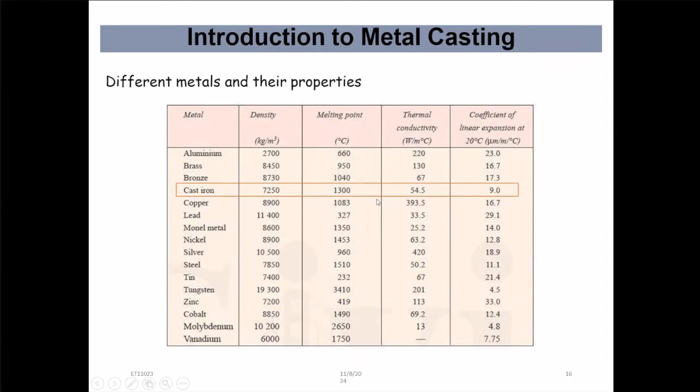Then let's move into why we used sand as the material for making the mold cavity.

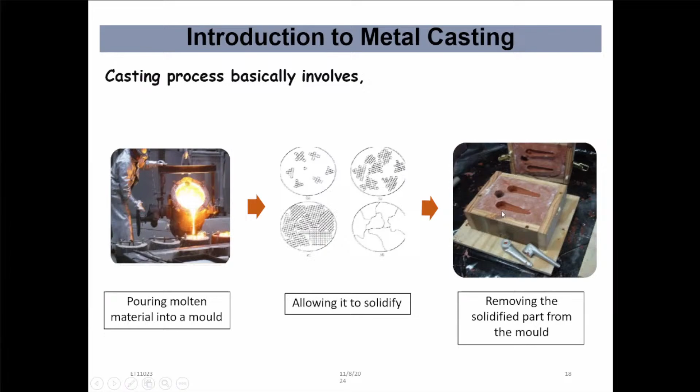Then it's solidified, we can get out that casted part. Then we have to break that mold cavity, take out the part.

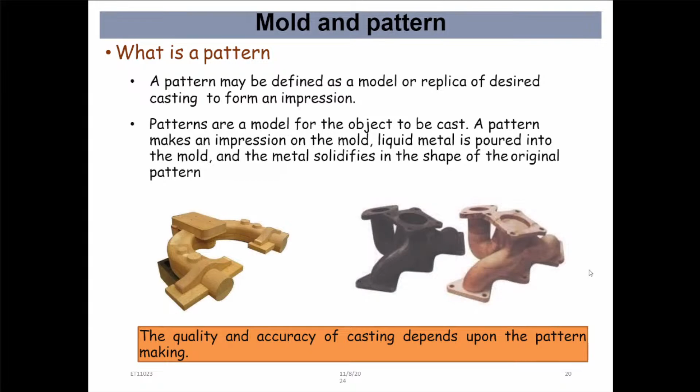Then the pattern making materials. The most widely used material is wood. What are the reasons we use wood? It is cheap and light. It can be cut and fabricated into numerous forms by gluing, bending and carving.

Because we can easily shape it using tools in a wood workshop, and can create a smooth surface by sanding. It also has a tendency to wear by constant contact with sand.

The main reason is the durability and the ability to shape it easily. Wood is the most widely used material in making patterns.

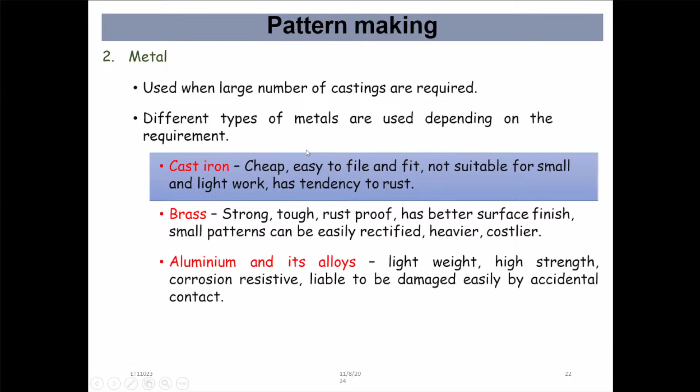These are some metals used for making the pattern.

Then there's plaster, the plaster of Paris or gypsum cement. These are other materials that can be easily cast into intricate shapes and worked easily. Plaster of Paris has a very high compressive strength. We use this plaster to make small kinds of patterns.

Another material is plastic, specifically thermosetting resin. Did you hear about thermosetting resins? Thermosettings, thermosets, thermoset materials.

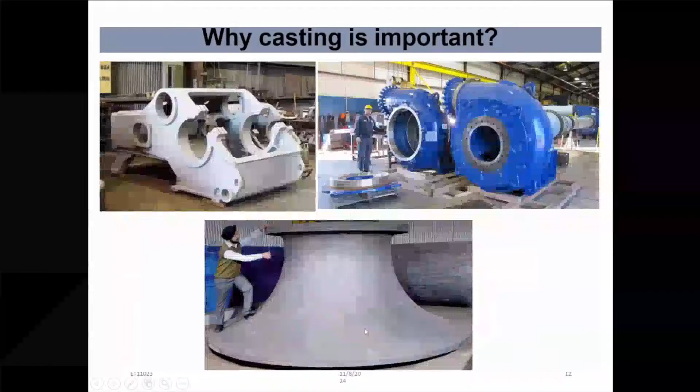I explained earlier: shrinkage and porosity. What's the meaning of shrinkage?

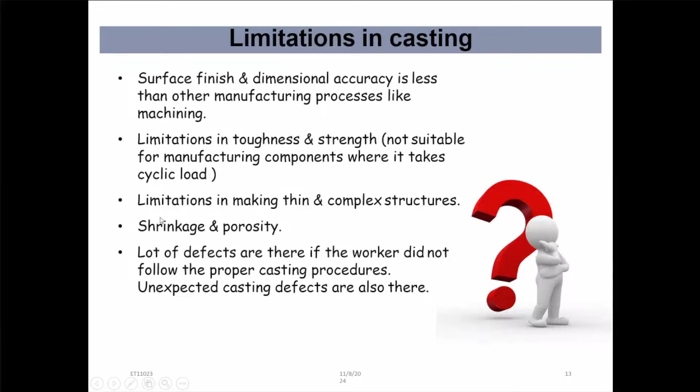Shrinkage means there is a phase change, a phase change from liquid phase into solid phase.

Then what happens? The volume of the solid body decreases with time. Yes, the volume of this solid body decreases with decrease in temperature.

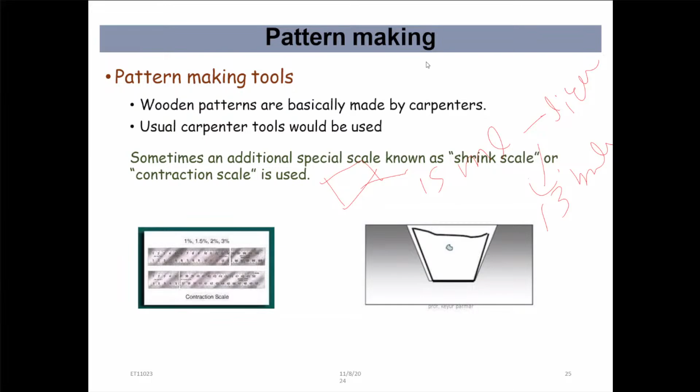Then let's move into the pattern making. Types of pattern.

Selection. The selection of the types of pattern depends on the shape and size of the casting, the number of castings required, and the method of molding.

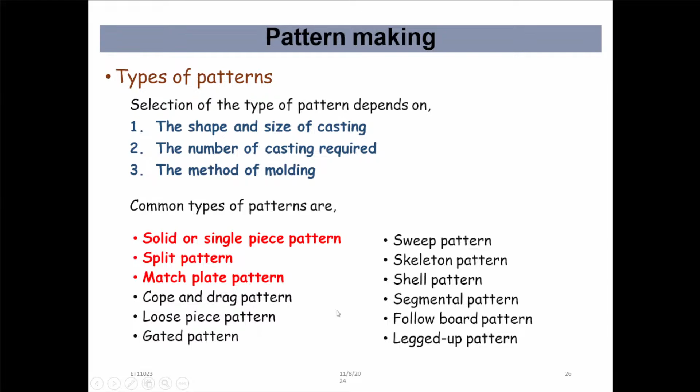Common types of patterns are solid or single piece pattern, split pattern, match plate pattern. I'll explain the red colored one only; the others are for your further reading.

Solid or single piece pattern. It has a compact single solid body. Actually, this is a single part. We don't need two separate parts, or two parts in the whole system.

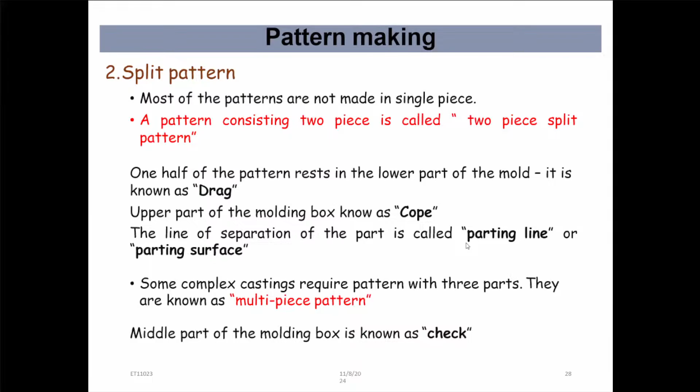Okay, you will see the two-piece split pattern. You can see how it may look.

Why do we need this kind of core? What's the reason for this?

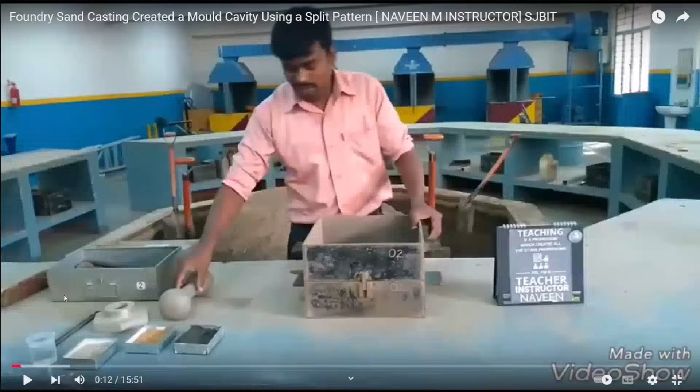This is called a split pattern. Split pattern means two pieces come, one from the top box and one from the bottom box. The other pattern is the single piece pattern, also called a solid pattern. This is the molding box. Here are two boxes - the top box is called the cope, and the bottom one is called the drag box.

Then we want to create the cavity using the pattern. First we want to use the bottom box. Lift the top box and take it out.

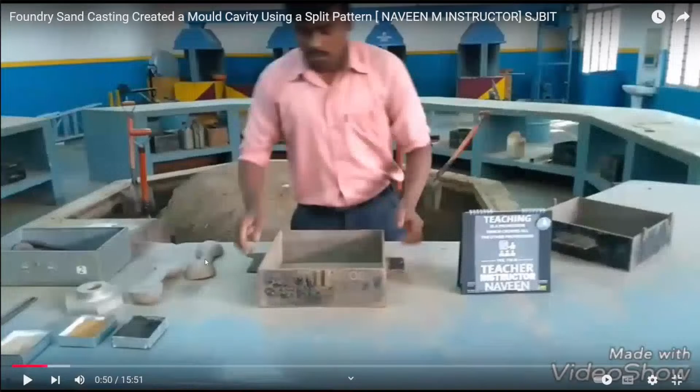What is this? These parts - can you hear this part? Can you see this part? What do we call these parts? What's the name of this part? These two items.

These two are the patterns.

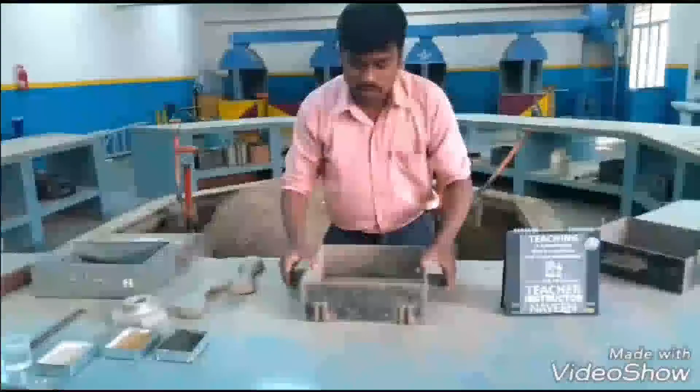Once the box is positioned, we place the pattern. It is the split pattern, which is a dowel pin concept. Where the flat surface is there, we want to place it properly - place this one properly in the middle.

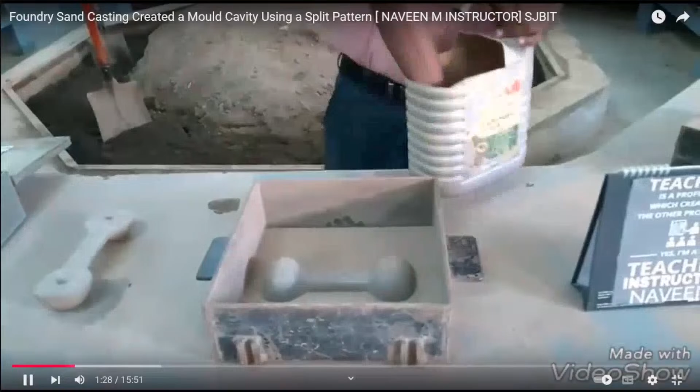Now apply a little bit of parting sand or chalk powder. Why we are applying this - so the sand doesn't stick to the floor itself. Apply it just like a powder.

Now we are using the green sand. The green sand contains clay, red silica sand and moisture. There is a certain percentage in which we mix the clay, moisture and bentonite powder. Already we have mixed the green sand - just here it is the sand.

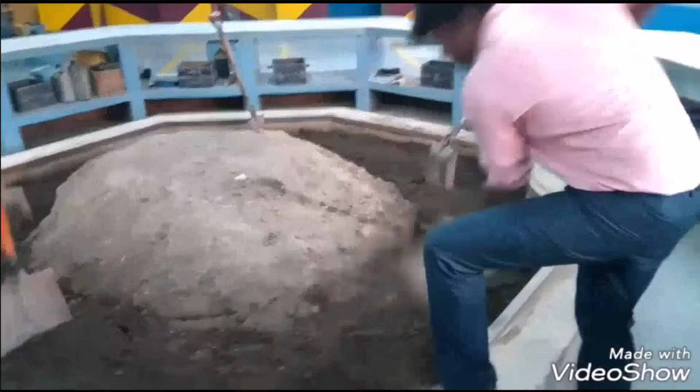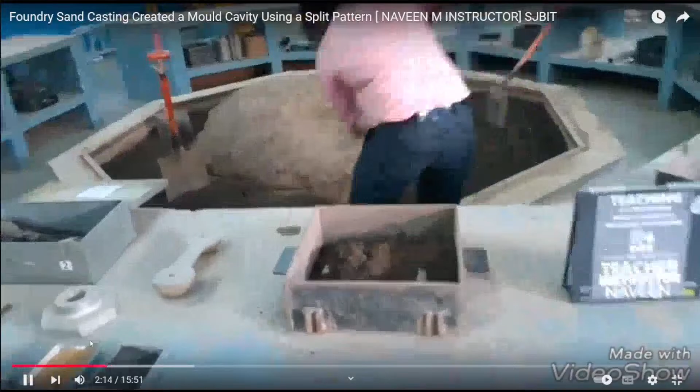If nothing will happen, we use our hands and don't require gloves. Why - because here the moisture, clay and bentonite powder are mixed in the sand. Just arrange the sand.

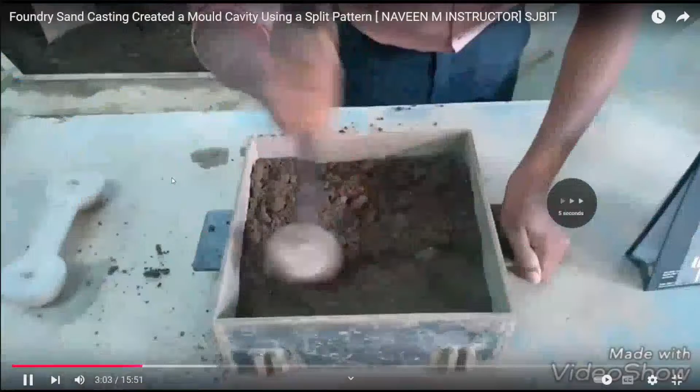Next, use the pin hammer - it is called the pin hammer. Why we want to use the pin hammer - because we want to do the ramming properly at the corners, using the pin hammer itself.

Once the ramming is completed, again put the sand and do the ramming.

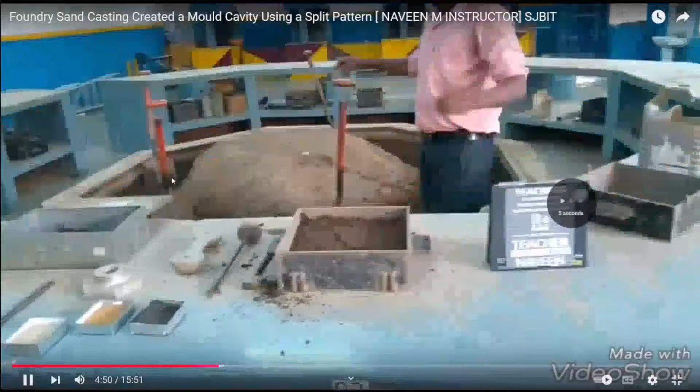Use the leveler - it is called the leveler. When you are using the leveler, at a time you cannot level the whole box. Step by step you want to do the leveling.

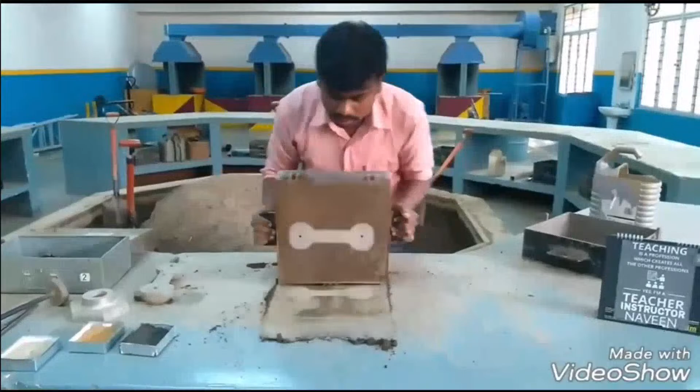The box. This is the cope or the drag - this is the upper part or lower part of the box.

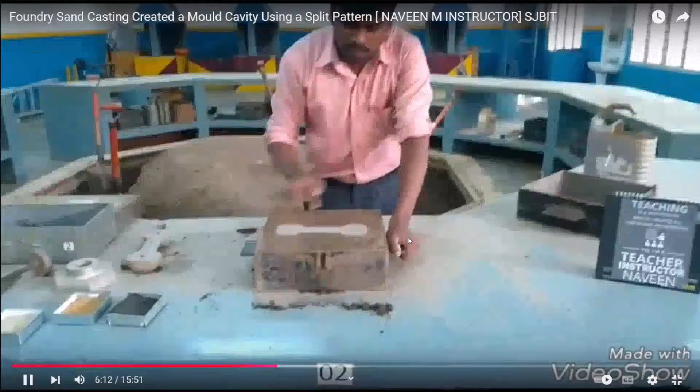Properly, where the dowel hole is there, we want to match the dowel pin like this. Once the pattern is placed properly, we place it.

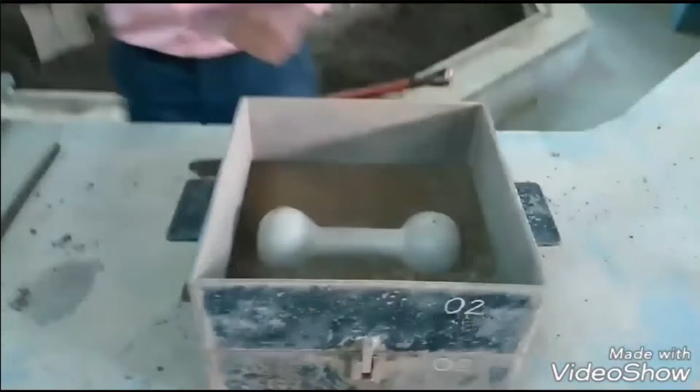Place it here. Okay students, what is this part? These parts - what's the purpose of these two parts?

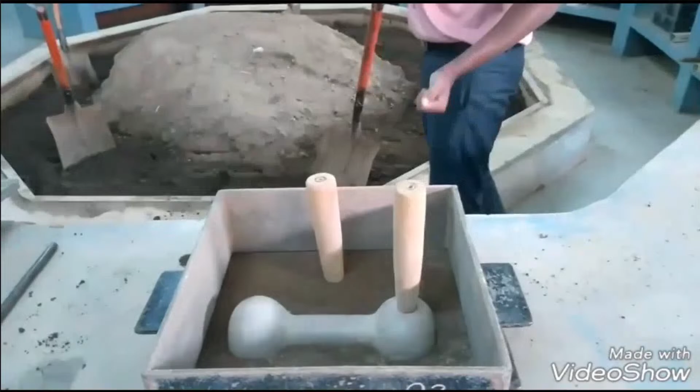Now take the sand, put it in and do the ramming approach. Before putting the sand, apply a little bit of parting sand.

The same way we rammed the bottom box, step by step we want to ram the top box.

Now the top box ramming is done, use the leveler and level the top box also. But when we are leveling the top box, we want to level around the runner and riser carefully. Here also, step by step.

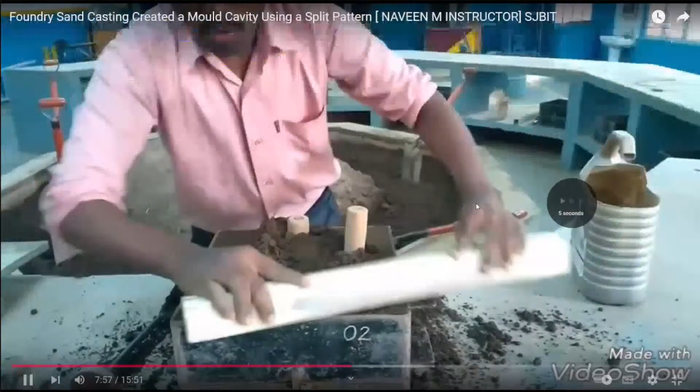Now carefully lift the top box.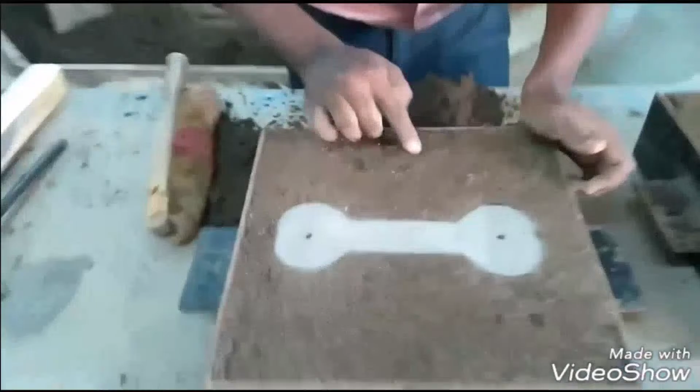Just observe - one impression is the runner impression. This impression we want to mark - that means it is the gate. We want to cut the gate from here for pouring the molten metal.

Just mark the impression - your round impression, the runner impression is there now. Just mark it for that impression, which wants to connect with the pattern.

Now make the dip - maximum we can make it 5 mm, minimum 3 mm. Create the gate here.

Now we have cut the gate. Just clean the gate - just observe how to clean the gate. Finish the corners.

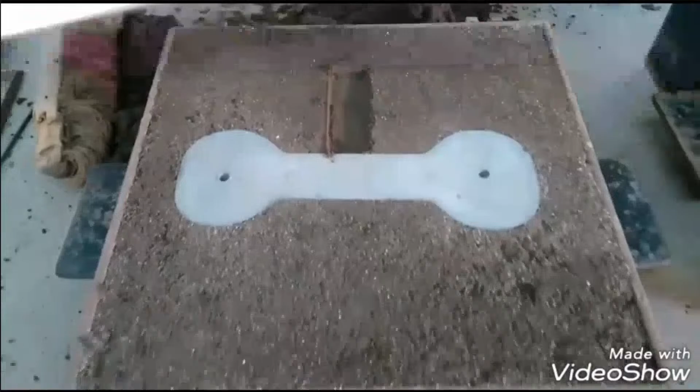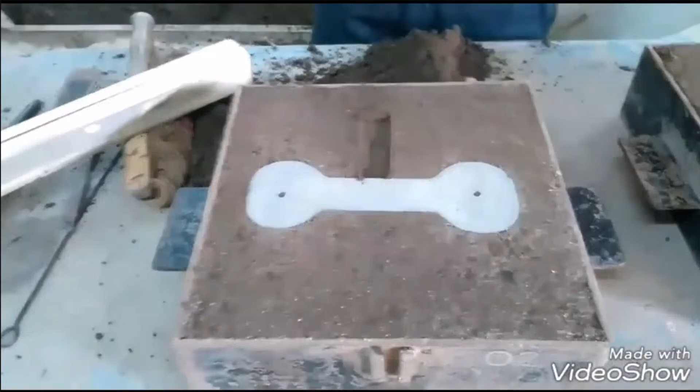This is called the mold cavity. This part is called the runner, that's for flow of the liquid molten material into the cavity. Now look at one more top box.

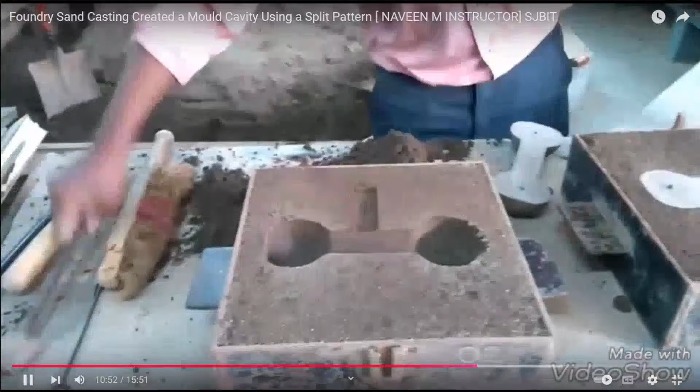Now this created the cavity. We have placed the top box from the bottom box itself, meaning here itself we are pouring the molten material. Just observe, now we want to place the top box. It is fully finished. We have created the cavity from split dumbbell shape split pattern.

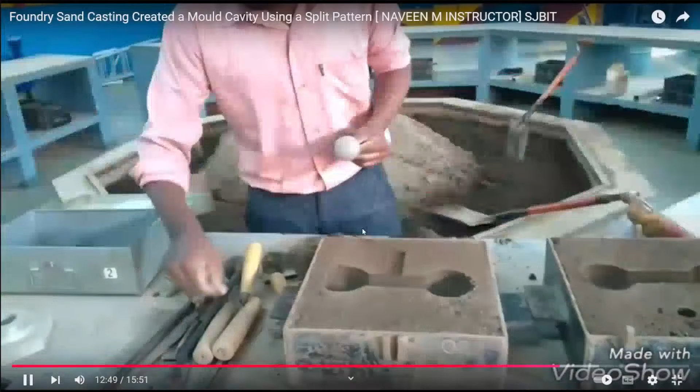Just observe how to finish the smoother. Just observe how to smooth the surface like this. We can smooth the surface.

Use the small lip leveler and level this one properly. Don't put too much sand, only as much as required. We can finish it like that. Now we have completed updating the top box.

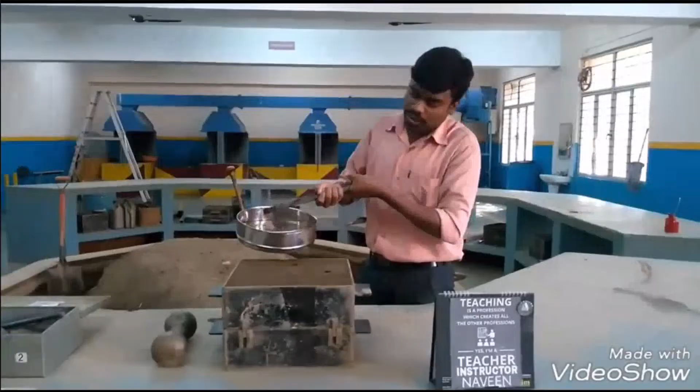Now we pour the molten metal. It is not, we are pouring the wax. So once the riser is filled, we want to stop pouring the molten metal. Now we will pour the molten metal. After solidification, we want to break it. We want to give a little bit of time for solidification.

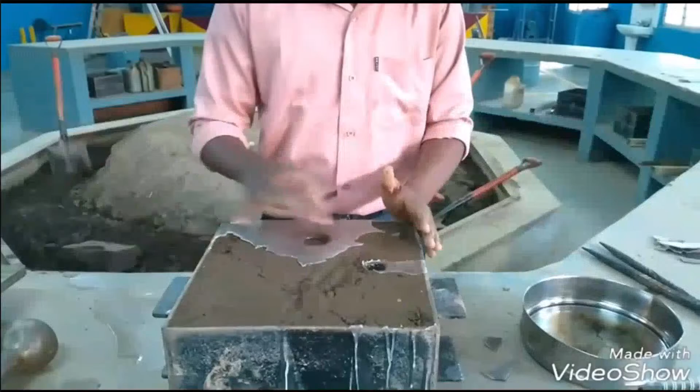After it is fully solid, we want to break the box, and whatever cavity we have created inside, the casting becomes as it is. Now we have poured the molten wax. We want to give the time for solidification. After solidification, we want to lift the top box. It is fully solid, now lift the top box.

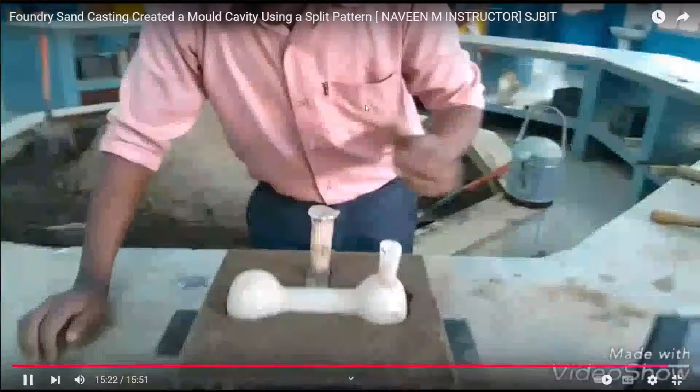See, we have broken the top box. See how the casting is stable. It is the riser, it is the runner. Finally, we want to cut the riser and get the runner out. You can see these two parts: this is where we pour the molten material, and this is the riser.

We can see that after filling this whole mold cavity with the liquid molten material, it will rise up. Then we guarantee all the volume will be filled with the molten material. Then the casting will come. Finally, we have to remove the excess parts, then finally we can get the desired shape.

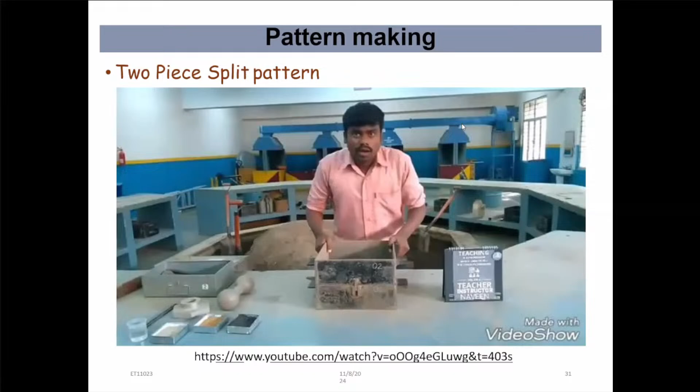Then the match plate pattern. The third pattern type is the match plate pattern. That's a single pattern where a number of patterns may be mounted on a match plate. The plate can be made out of wood or metal, mostly aluminum. The reason for using aluminum is the lightweight and high strength, because it is a durable material. That's why we use aluminum as the pattern making material.

Then the cope and drag portions of the split patterns are mounted on opposite sides of the plate. You can see this image. This is the upper part and this is the lower part. Both the upper part and lower part are attached to one single plate.

That means if we need to make this part, we can cut it in this plane and mount the upper part to the upper side of the plate and the lower part to the lower part of the plate. Then we can make the riser, I'll explain the riser and other things later. Then we can make this whole part as the pattern.

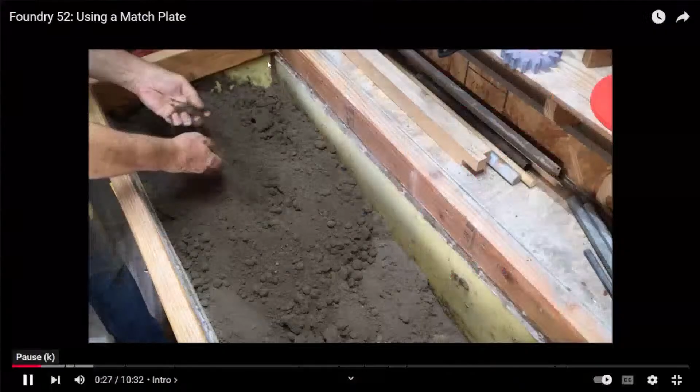So can you see the video? Hello. Can you see the video? Yes, sir, we can see the video. Okay.

Here we started with the drag.

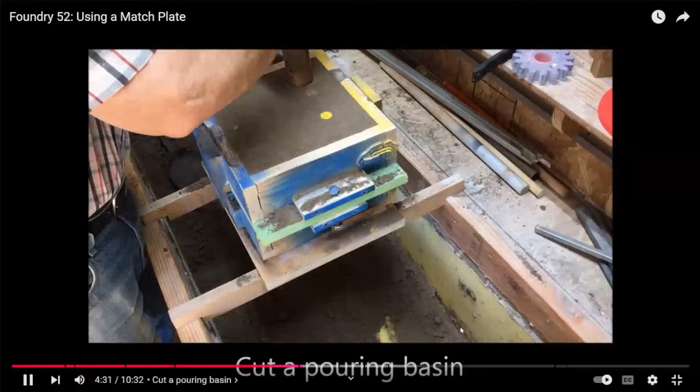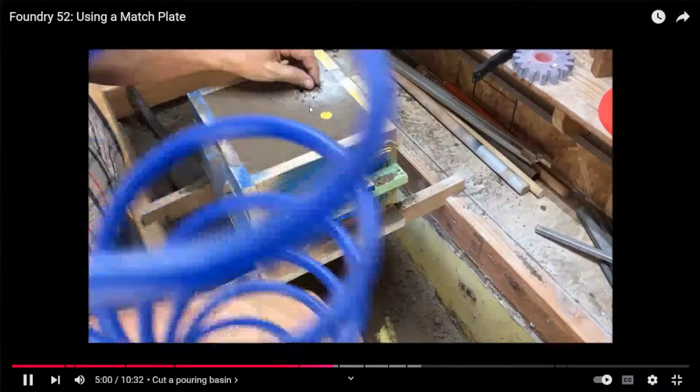Then cut a pouring basin. Actually, he increased the size of the pouring cup here.

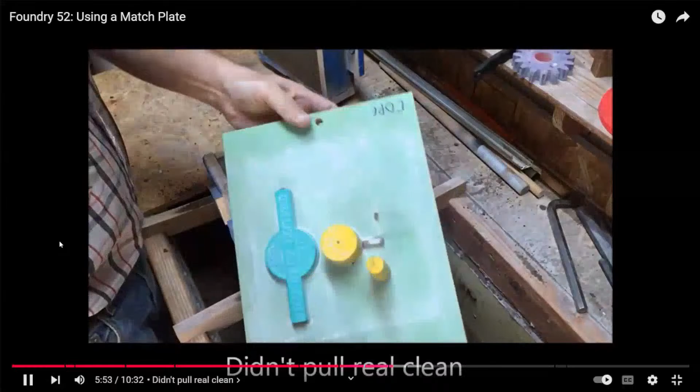Actually, this is the match plate. This one is the match plate. This is the mold cavity that we need, the required shape. It has the required shape actually.

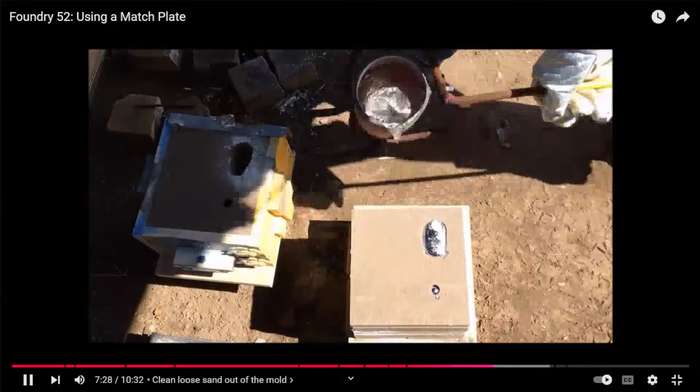This is the open riser. You can see the material comes out from the open riser. Then we can ensure the whole mold cavity will fill with the molten material. Finally, we broke the mold cavity and we can get the part out.

This is actually, we need only this part. We need only this part. Only this part. But these are the additional materials.

Now you can answer the previous question I asked. What's the reason for high production rate when we use the match plate pattern? Now, can anyone answer me? Can anyone answer me? What's the reason for high production rate when we do the casting using the match plate pattern?

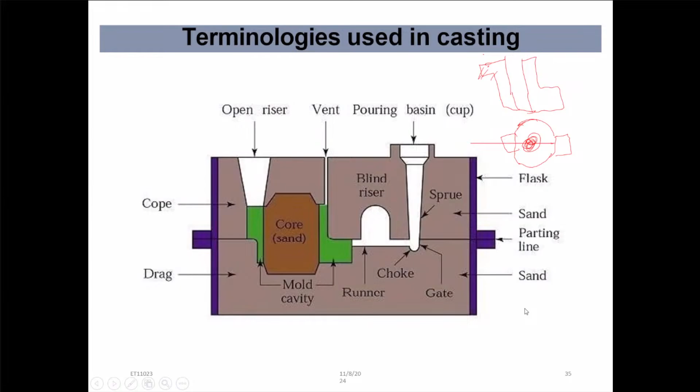And what's the purpose of this gate? There is some slag with this molten material. The slag is contaminated at this gate point, and the clean molten material flows through this funnel and fills this mold cavity slowly. Then the quality of the final product is good.

Core - I think I explained about the core earlier. We need a core to build the interior parts. Molding material means the metals or alloys, or likewise any materials.

Flask, cope. Cope means the top half of the pattern. Drag is the bottom part of the above features. And core print - what's the core print? Core print is the region added to the pattern. Core print is used to locate and support the core within the mold.

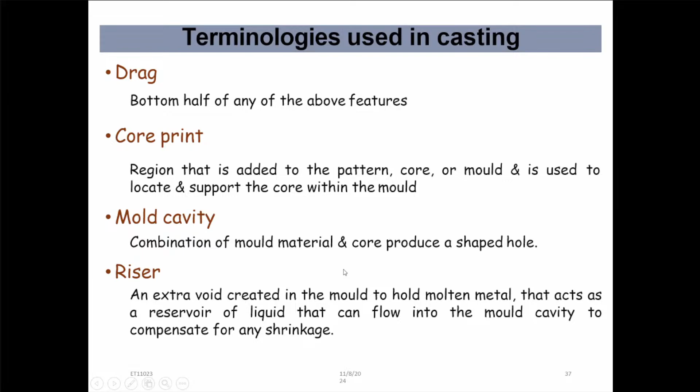This is the core print, because we have to hold this core in horizontal position here. In this casting process, we have to hold this core horizontally. Because we require some support to hold this horizontally, that's called the core print.

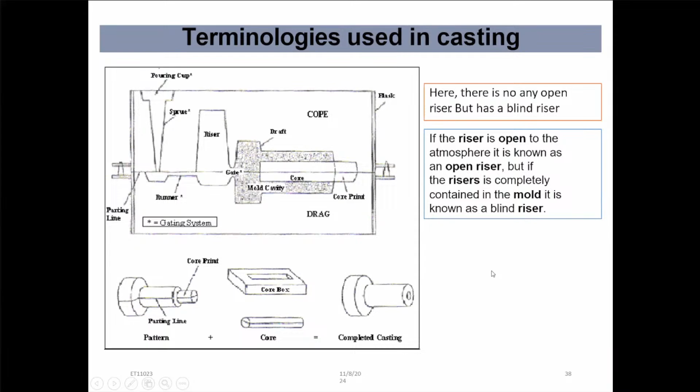Then the gating system. Gating system is the network of connecting channels used to deliver the molten metal to the cavity - the channel used to take molten metal into the mold cavity is the gating system.

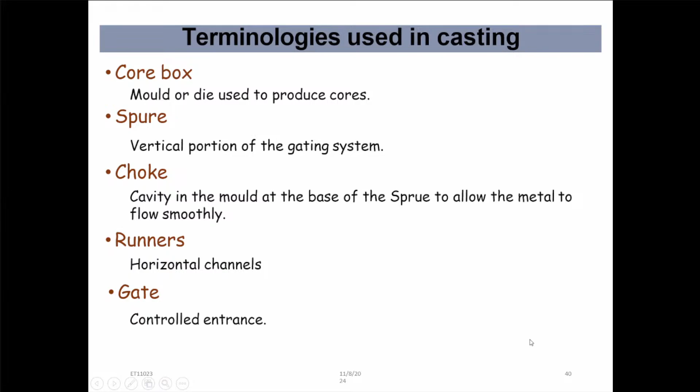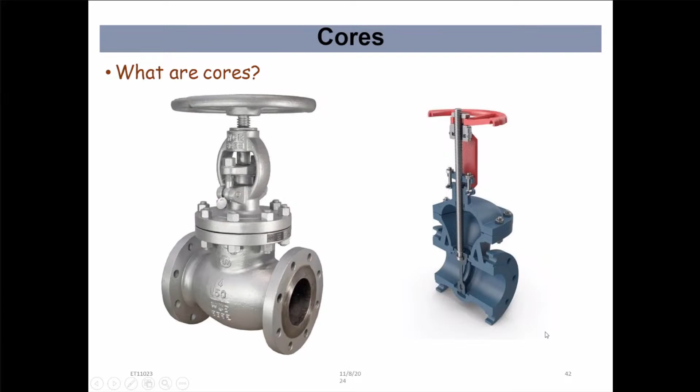What are the cores? Cores are defined as solid bodies used to form the hollow portions or cavities of the desired shape and size in the casting.

Commonly, they are made in sand and separately in the core box. As I told you earlier, that also should be collapsible. Otherwise, we can't make the hollow part in the object, because the core materials are also collapsible.

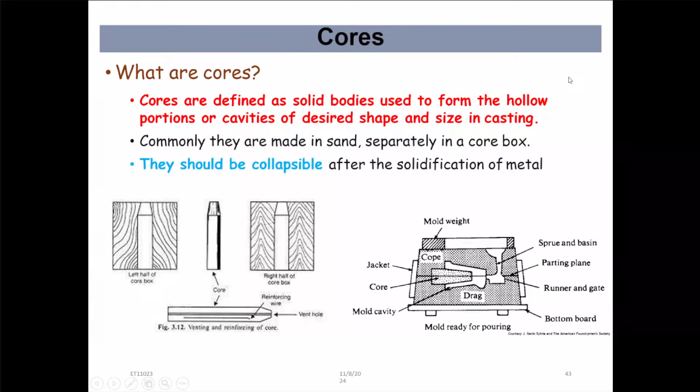Making the core is the same as the casting process. That is another casting process, another cavity making process. Core making is another mold cavity making process. Okay, same as the previous one.

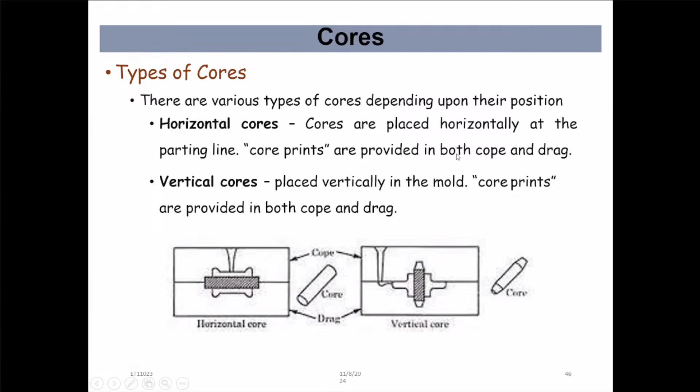Type of cores: balanced core, drop core. You can read the slideshow, I'll give you the slideshow. I'll explain you, and you can refer further details using the internet.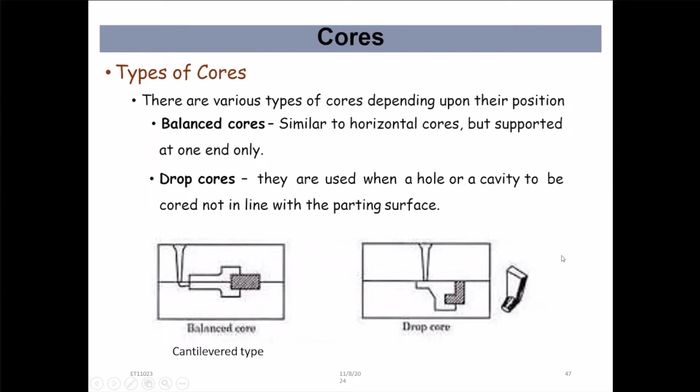Type of cores. Core settings - what's the meaning of core settings? Core setting means it has to be placed in correct orientation and the correct position in molds. That's called core settings.

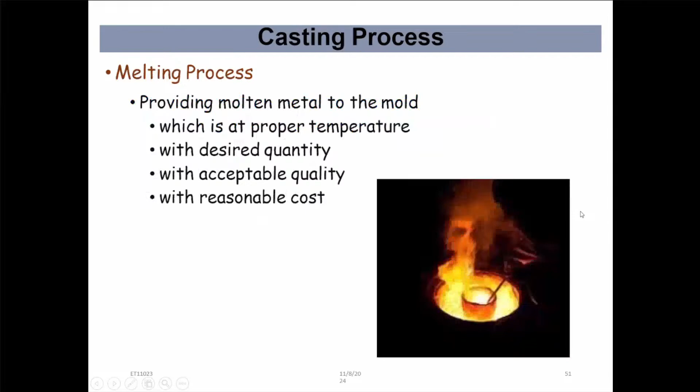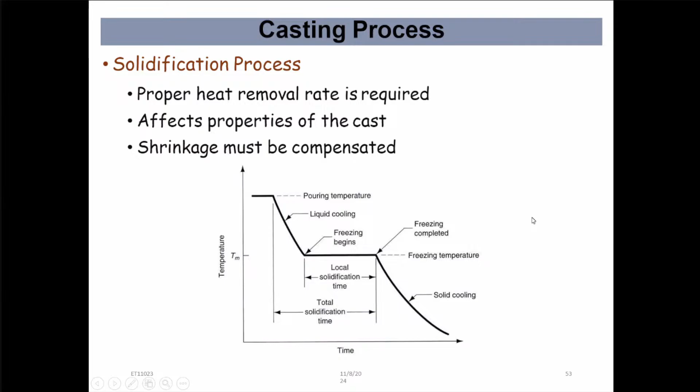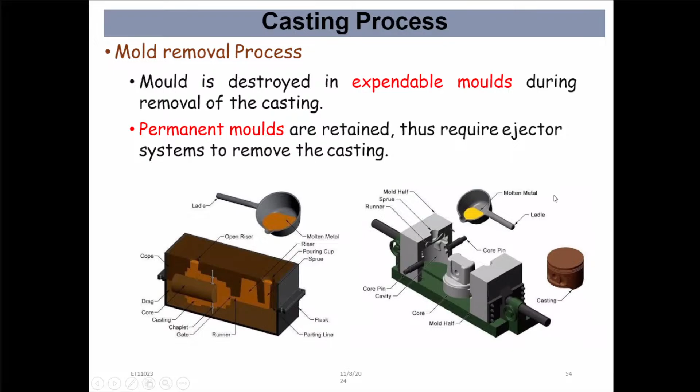Finally, we can do the cleaning, finishing, and inspection process. The inspection is very important in this casting process - that means quality checking. We can scan in these things, we can inspect by hand or some other kind of quality checking process. We can check the defects of the casting process, the casting product.